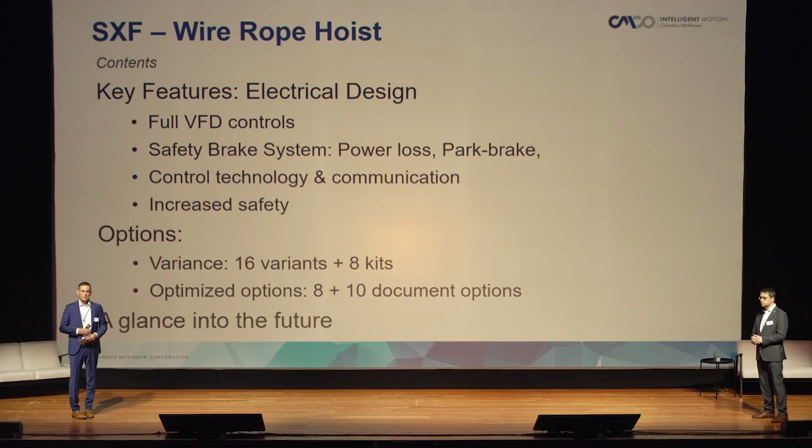Excellent, thank you. As we move towards the end, we'll have a look into where we are now with the product release and maybe some highlights to be seen in the future. To get started, we heard this topic raised a few times yesterday - a little bit of a teaser that Mark did up on stage, and we heard it a few times in different presentations. So the background to this project - why have we got this wire rope hoist, and what were the parameters that determined the project scope?

Basically the whole project started back in 2022, approximately, where we had the voice of customer feedback. There were also, as Mark mentioned yesterday, individual interviews to get your feedback on what you want, to better react to the market with a new product.

What we heard from you was that you need a hoist in the lower capacity range, somewhere around 10 ton and below. What was required here is a cost-effective solution. We know Stahl products have high engineering capabilities with a lot of off-standard options, and this often brings a higher price tag with it.

So, a cost-effective solution. And you can imagine at that time, 2022, we had some delivery and supply chain issues and struggles, as everybody did globally. So of course one of the key points here was also being readily available with shorter delivery times.

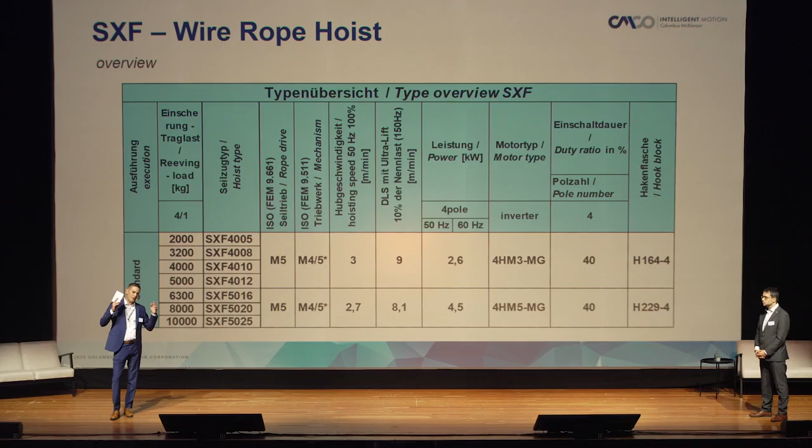So what we do have as we move one column further is, up in the blue field, this DLS mit ultra lift. Unfortunately, the field wasn't big enough to put the translation in there, but what that means is DLS stands for dynamic lift system with an ultra lift functionality. This is our increased lifting speed at low load conditions. Just hold on to that thought, and we'll touch back to that on the coming slides.

So we'll have to move on, and you may be asking yourself, where does this product fit into the portfolio? I touched on it before, and basically what we need to consider here is the technical specifications. As I mentioned, the product's not replacing any product lines, rather it has a new position in the product portfolio. The technical specifications together with the application determine the position in the product portfolio.

What does that mean? Basically, with this particular hoist system, we have a fit-for-function product. The idea is basically an out-of-the-box type system, so there's not a whole lot of changes in the system that can be done. It's out-of-the-box, plug it in, and it works and does its job.

We've had a focus here on easy design and installation, so definitely we've made some improvements with the new hoist design, for simple installation. One of the reasons we are presenting these highlights for you today is something we've been able to build up here as well: to integrate the expertise from the Magnetek product range into the STAHL wire rope hoist. Doing this, we've been able to create this DLS functionality, this dynamic lift solution, with higher speed ranges at no load conditions.

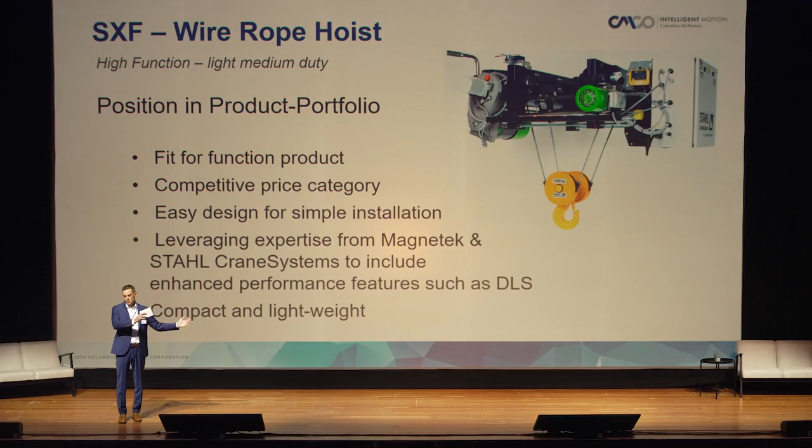Where it fits into the product portfolio, basically we're looking at a lightweight, compact class hoist in a competitive price category. So it's not designed to compete directly with the over-engineered product ranges that we already have available.

So as we look into some of the changes that have happened on the hoist itself, those of you very familiar with our products would have noticed straight away there's something missing. As we have a look at the hoist itself, the whole control panel has been moved from the gearbox side into a centralized control panel on the hoist.

Now we have our gearbox here. Starting from the top, we've got what Mark likes to call the 710 lid — of course, the oil lid, if you read it upside down or if it's been installed upside down, it's now a 710 lid, internal joke. Basically, we've got our oil breather valve at the top.

As we move down, we've got the gear limit switch mounted directly onto the gearbox. For the VFD applications, we have 6 switch positions: 3 at the top and 3 at the bottom. We have the slowdown area, respectively up and down, then the cutoff — the operational cutoff point — and then the emergency stop. We have this at the top and the bottom on this design.

An interesting fact that we have here is an encoder feedback. You may have noticed outside on the gearbox we have this little encoder mounted onto the gearbox shaft itself. This is a very unique system — the first of its kind where this encoder feedback actually goes directly back onto the SMC4 itself. So the encoder is not connected to the frequency drive at all. The whole controls are coming from the SMC4 and given through to the VFD drive itself for the hoisting motion. I'll touch back onto that again later as well.

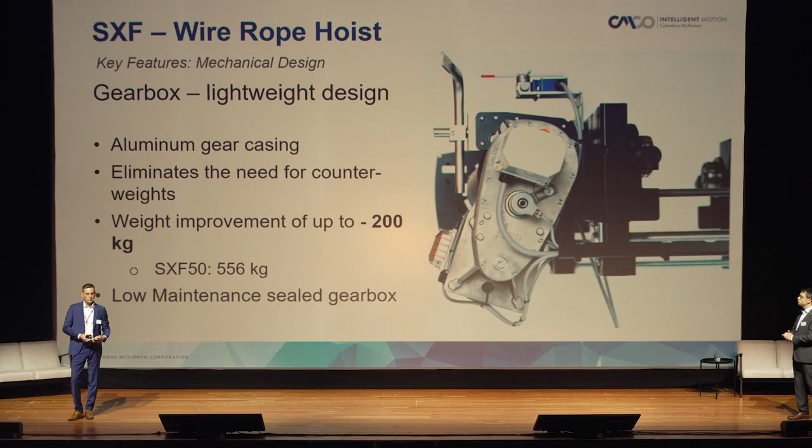If you later jump back to the product and look at it physically, just for our show purpose, we have selected a very small flange width of 160 millimeters. So only the 10-ton has then one small counterweight plate you can see if you know where to look. But all the units above 250 millimeters flange width do not have any counterweight at all. So with lightweight design on the gearbox side, and avoiding the counterweights on the other side, we have massively reduced the complete weight of the unit.

I'd like to take this opportunity to highlight one of the other special features integrated into this hoist system. What we have here is an adjustable flange width, as we had also in the past, but what we had to consider in the past was the counterweights.

Now, of course, the counterweights aren't attached to the hoist. For those familiar with our older SH wire rope hoist, we had the counterweights mounted on this side. When we adjust the flange width here, there's a shift of the weight distribution, and we'd have to put different amounts of counterweight on there to balance that back out.

Here we have a huge flexibility, a huge improvement. In most cases, there's no need to have a counterweight at all, apart from the scenario Mark just mentioned. So what that means is you have one hoist that you can put on stock and use for all possible flange width adjustments, apart from the one exception. That's a huge advantage, being able to take this hoist and put it onto any beam width without any further adjustments.

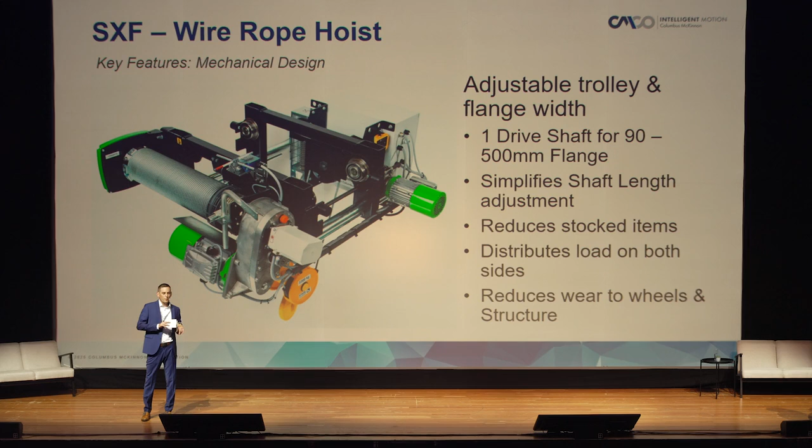This whole adjustable flange width is made possible thanks to a worm gear drive that we have installed here. You can see on the worm gear drive itself the drive shaft going straight through that gearbox, which allows us full flexibility for all possible flange widths.

Some of you that are really technical and familiar with our product may know that in the past on these drive shafts we had little snap rings. These have now been replaced with what we're seeing here on these smaller pictures with a locking clamp. What we have here is basically an adjustable clamping plate, so you can just loosen that screw, and that allows this shaft to be slid backwards and forwards.

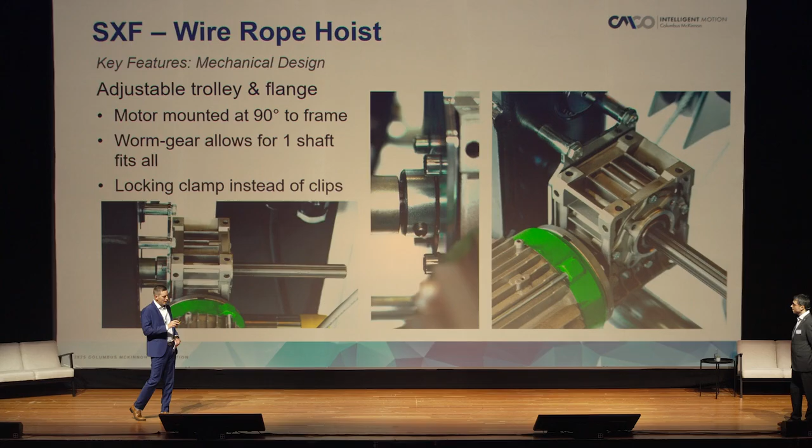You may be asking yourself, has this had an effect on the approach distances? When I see this motor here, 90 degrees mounted to the hoist frame, it could raise concerns about the approach distances of the hoist. Here you don't have to be concerned. Mark, I'll let you take over here.

So by flipping the travel motor upside down, we just get 40 millimeters better hook approach. However, if you sometimes need that last millimeter on the crane, and if you have a box girder high enough that there's no obstacle with the travel gear motor upside, you could turn it 90 degrees and save another 45 millimeters.

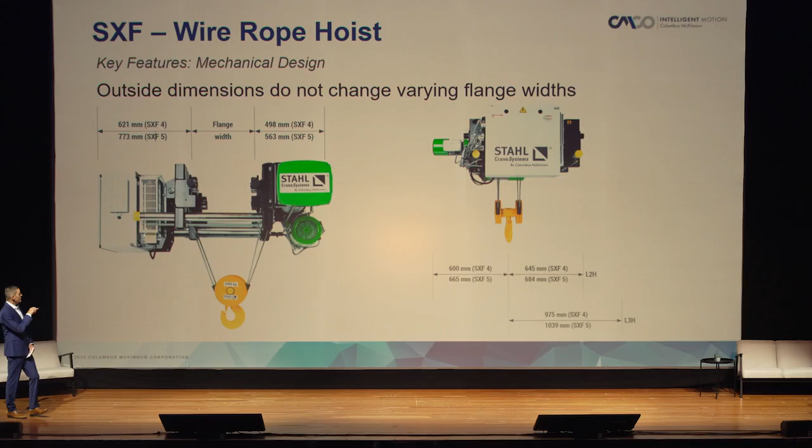So I guess what you're trying to say there, Mark, is previously we had the counterweights here on the SH wire rope hoist series, and with the control panel being mounted on the hoist frame, there's no change in the dimension regardless of the flange width. Is that right? Right. And you see also, especially here on the L2, the dimensions between left approach and right approach are very, very equal, so your approach load on the crane is very similar.

You would have seen outside also on the hook block itself, here we've got a new feature with us on the standard type application. We have a finger protection integrated into the hook block itself. Other manufacturers have systems similar to this, and a lot of them look at this in different ways, either finger protection or dust protection. Here we've managed to cover both scenarios, offering finger protection and also protecting the rope drive itself from dust, dirt, and things that might ingress into there.

The rope guide is a system we've been using for a very long time, so it's the system we've continued to keep on this hoist. You may have noticed this particular design is now in a hardened plastic design. But what's most important is that we still have a 360-degree clamping effect onto the rope drum. So if the rope was to be pushed against the rope drum, it would create an overwinding or slack rope situation that could become dangerous. We have a guaranteed 360-degree clamping effect onto the rope drum, holding pressure onto the rope the whole time, and we have a tension spring, as we had up until now with the other designs, holding pressure onto that rope.

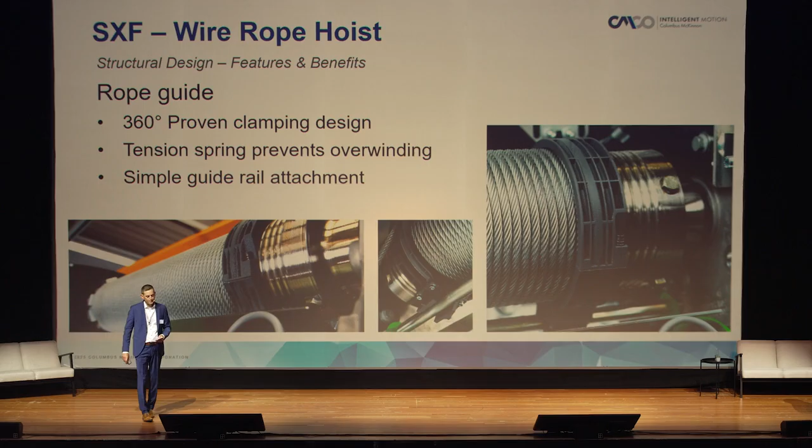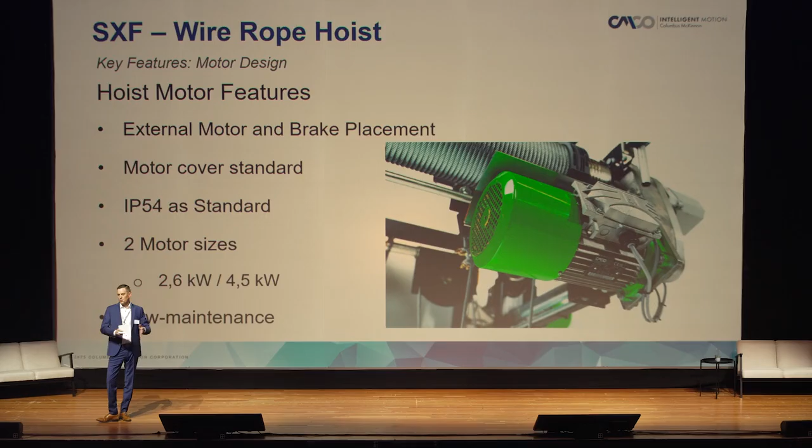As we move on to the hoist motor, there's not too much to go into detail here, remembering that our design target was to keep it simple, with easy access, low maintenance, and reliability. So here we have a hoisting motor from a European manufacturer, a very simple setup running an open loop circuit on these hoist configurations. So there's no encoder on the motor, remember we saw the encoder on the gearbox, so there's no encoder here, which makes for easy inspection and easy access to the brake. For yearly inspections, we have 2 motor sizes in total for the whole hoist range, and IP54 is standard, as we're used to for these types of applications.

So we can get into the electrics. Personally, for me, this is the more interesting part, but we're of course limited on time here today. I want to highlight some of the features we have in here. We have to consider, as I mentioned at the start, a hoist fit for function, out-of-the-box application, and what we have integrated into here as well is really high-quality products.

So we have the new SMC4 multi-controller device, as mentioned. The complete control panel has now been moved from our famous green control panel into a central control panel on the hoist here. Starting from the top left, we have the Magnetek inverter VFD for the hoisting motion controls, and on the right-hand side, we have the inverter for the travel inverter controls. I'd like to take this opportunity to mention a few facts about this. What we have here is variable speed control for the whole hoist unit, of course, but we also have some features and functionality in the background of these devices that offer good troubleshooting capabilities.

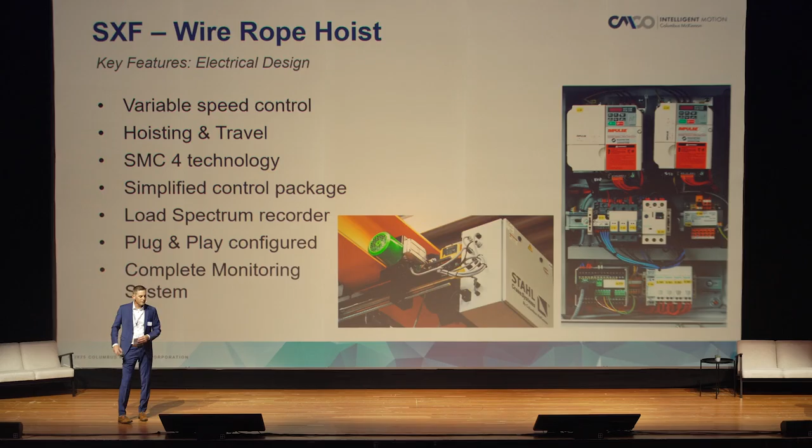Exactly. In the SMC4, we have this load spectrum recorder. Mark touched on it before—the values of the hoist are recorded, so the full load values are recorded. I can read these out for a yearly inspection and see exactly when the hoist may need a major overhaul or major service, or see the remaining running life cycle left on my hoist. The whole system is plug-and-play configured with complete monitoring systems, and as mentioned, the SMC4 is the complete control unit for this hoisting application.

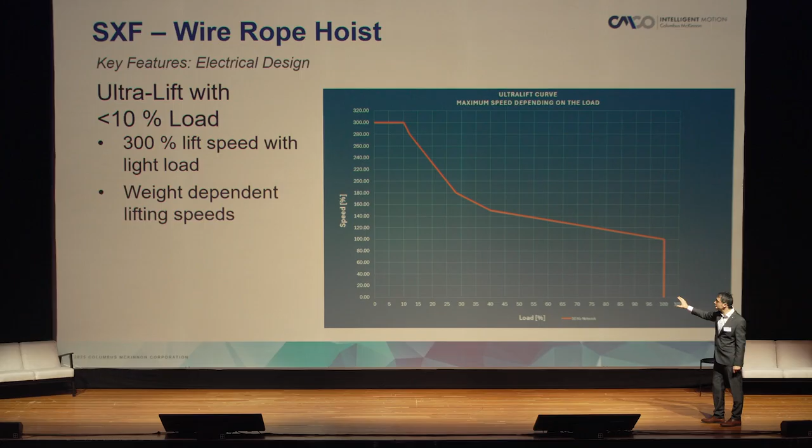And here we're seeing now a brief table of the UltraLift DLS functionality. Mark, please. Yeah, so you see on the left-hand side the speed range, and on the lower side you see the load. This curve is currently also subject to further improvement, but for the time being, if you order a hoist today, you will get 300% of speed up to a load of 10%, and then we follow the motor curve.

At 300% speed, representing 150 Hertz, or equivalent 4,500 revolutions per minute, we are in the position of the motor where we talk from the field weakening point. The field weakening point at these motors starts approximately at 87 Hertz, going all the way up to 150 Hertz or 300%. So we need to reflect that in the SMC.

We do that at complete performance level C. So all the speed monitoring and load monitoring is done in a dual channel mode. We have two kernels inside the SMC, and these two kernels are also interchanging values with each other so that we can claim that performance level C. These kernels, those processors, microprocessors, are also certified by TÜV.

So we follow the motor curve, and the bigger the load gets, all the way up to 100% load, we are then at 100% speed. That means in our case currently 50 Hertz, resulting in those 3 meters per minute hoisting speed, as mentioned on the previous slide.

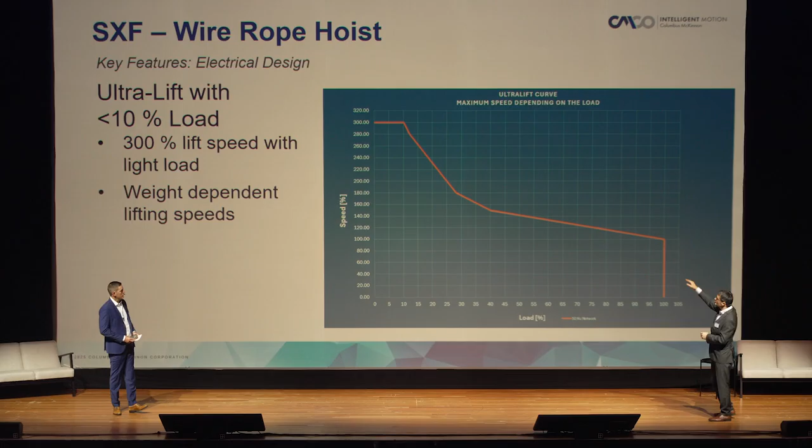As mentioned, it might be that we go a little sharper in the curve the more experience we get with the systems. Currently, the motor torque has quite a good portion above that, so the safety factor is much more than 2 currently, even more with the 2-speed motors. So it might be that in future—without promise, and therefore not shown here in writing—even 30% could be handled with high speed at the end. As mentioned earlier, we are not finished with the development in that complete series. What we have launched today and what is available with Sales Manager is what you see here, but further improvements may happen soon.

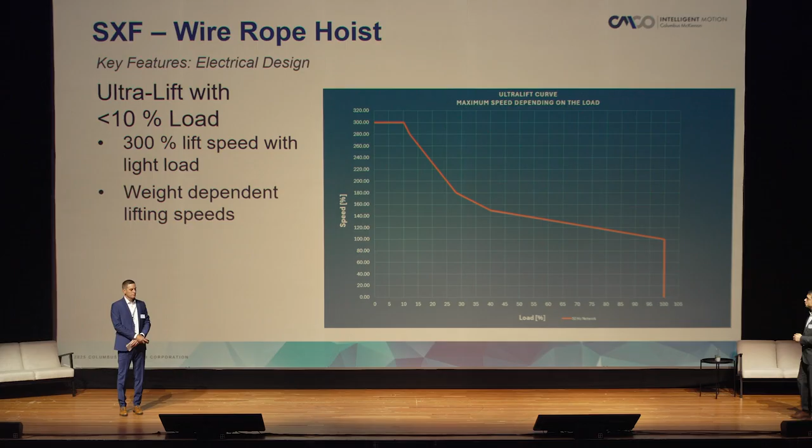Yeah, last but not least, I did mention a few of these points, or highlight a few of the points that are available with the SMC4. The SMC4 has been on the market for about 2 years now. It's an application-based device. Currently we use it for VFD applications on the SHF wire rope hoist, and of course now in this hoist here.

One of the special features that this device brings with it, as Mark just touched on, is the safety relays. The SMC4 is controlling the VFDs, and it's also cutting the VFD off in the event of a fault through a safe relay. This is something very critical and a huge highlight for this device, making it really the brains of the device when we're looking at this type of application.

So the SMC4 brings a lot of capabilities that we're used to or that you may be familiar with from previous devices. We have these load spectrum recorders in here, made possible through the SMC4's load-dependent hoisting capabilities.

For this particular device, I'd like to mention we have new software. This was needed to realize and view all of these rotation control parameters, since we have an encoder running through here now. It's a much more complex system, so we needed a new program to view all those data sets and be more flexible with the data itself.

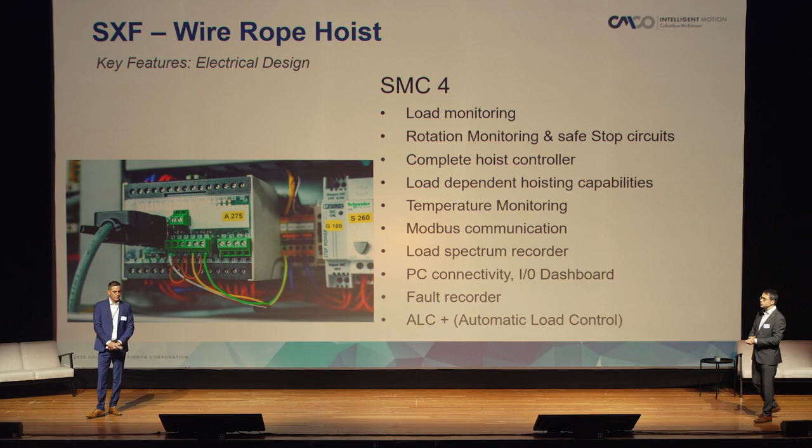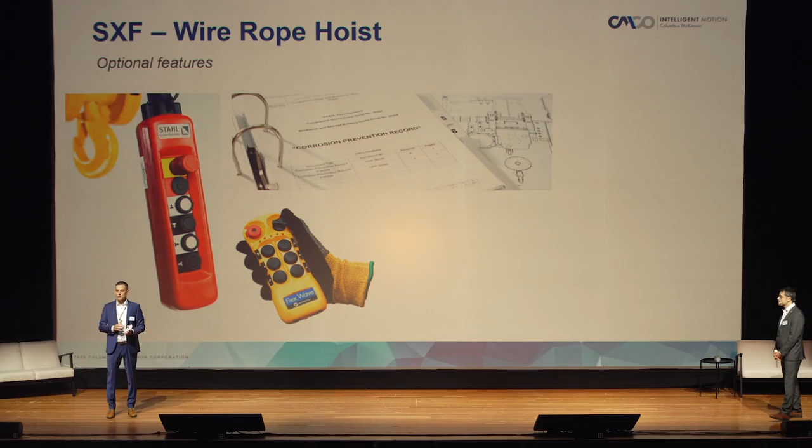Great, thank you. Mark did touch on some of the options at the beginning of the presentation. Of course, we also have radio controls on the system, end limit switches for the travel directions, and documentation options in the hoist configurator that's available.

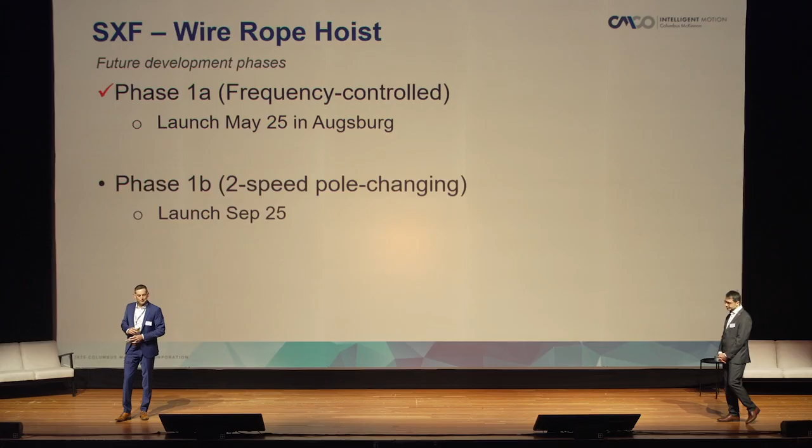Where we are today is the product launch. The launch was officially yesterday, so phase 1A is complete and the hoist is available in the system. Further steps to come, as we mentioned, will be a pole-changing motor - look forward to that release towards September, October, around that time frame.

With this system, we have a lot of technical changes to the hoist itself. So towards the end of the European summer, we'll be offering a one-day training package specifically for this hoist. Different from what we've done in the past, where we offered training programs for the hoist and then separately for the condition monitoring devices.

Here we'll be doing a complete package, offering service, maintenance and inspection training on the hoist itself, also touching on the fundamentals of the VFD controls, the condition monitoring systems, basically giving you a complete day's package training for this hoist series itself.

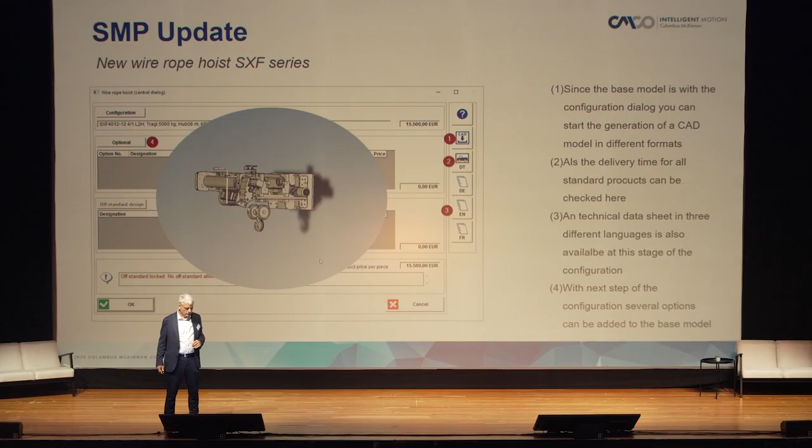The next button is for the standard delivery times - this is linked to our homepage, and you can check the delivery times. And the third is the technical data sheet button, so we have the technical data sheets available in 3 languages. It's also an additional document you can save locally and provide to your customer.

I hope it's not too fast. But all the people who are working with the program all the time, they know it's the same way as with all other products with our configurator tool.

So if you go to the next slide for the options, you have several options available, but it's a focus on the most needed options that are all things to make it more economical and to reduce the lead times. So the product has, with the complete control, for example, also the radio control available as an option.

And yes, the way of doing is very similar to all the other products. So very fast to the SXF model. The SXF model is configurable as a single hoist, as with this example, but it's also included to the crane kit configurations for the overhead cranes and also for the monorail cranes and the jib cranes.

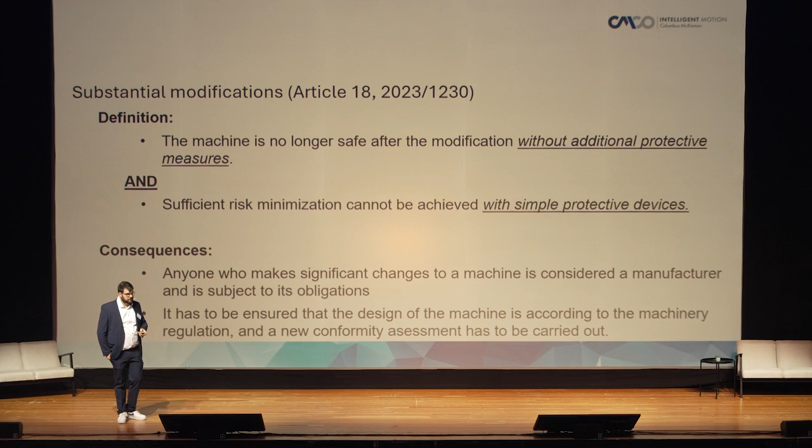So now let's start with the actual amendments. Let's start with a term called substantial modification. What is that? If you get a machine that already has a CE sign on it and you do some modifications, you need to see if you created new risks doing this modification, and you need to see if you can minimize this risk with a simple protective device. If this is given, you basically have a substantial modification to your machine, and therefore you have some consequences to face.

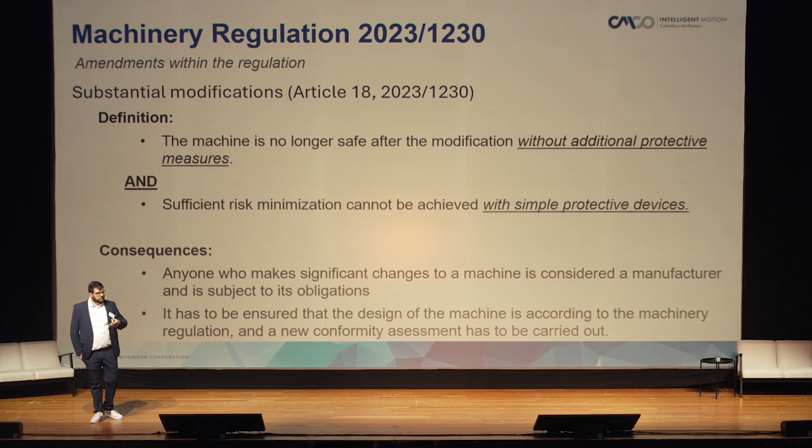Anyone who does substantial modifications is considered a manufacturer and has the same obligations as one. Therefore, if you do so, you need to ensure that the machine complies with the machinery regulation, and you have to perform a new conformity assessment as well.

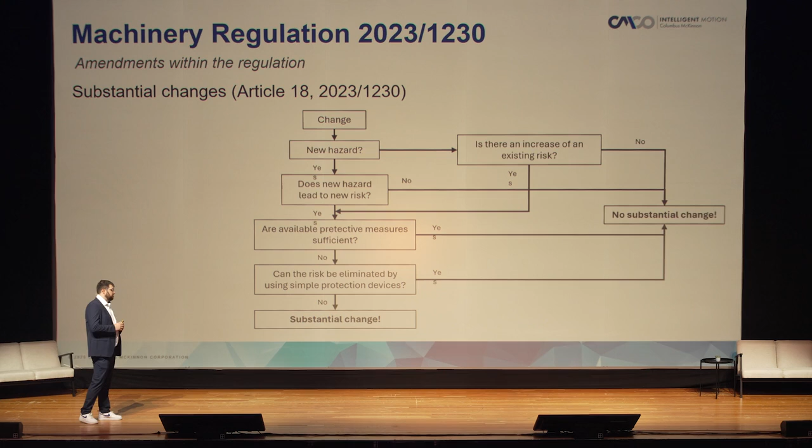If somebody is interested, we can also share this picture. I think it's a great opportunity if you face such a challenge.

Now coming to the biggest point, basically, which is the digital user manual, declaration of conformity, or documentation in general. With the machinery regulation, you are allowed to provide your documentation in digital form. But of course, you have to observe some points to do so.

You need to place your QR code or your RFID chip or whatever either on the machine itself, the associated product, the packaging, or accompanying document that comes along with the machine. The customer must be able to download it, print it, or save it somewhere so he's able to access it from anywhere, especially in case the machine fails or something like that.

And of course, a machine lasts some years, hopefully, and therefore you need to provide the data for the predicted lifetime of the machine, but at least for 10 years.

And now the last, but one of the most important points: the customer still has the right to ask for a printed version of your documentation. And if he does so, you need to provide it to him within 1 month and free of charge.

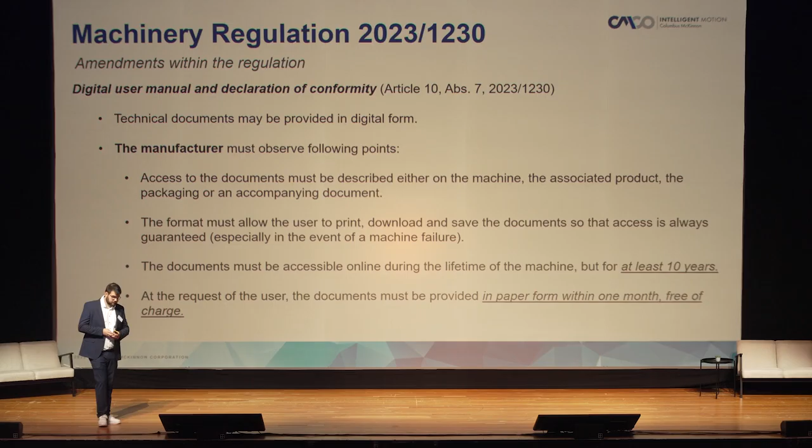Let's talk a little about the conformity assessment procedure. Basically, this is the main part that everyone takes into account when releasing products. Using harmonized standards or parts of them still stays valid.

So you design your product, you use harmonized norms to do so, you do your risk assessment afterwards, you collect your documentation, and then you create your CE conformity declaration in the end. That is still valid. What is new is the presumption of conformity by a technical specification.

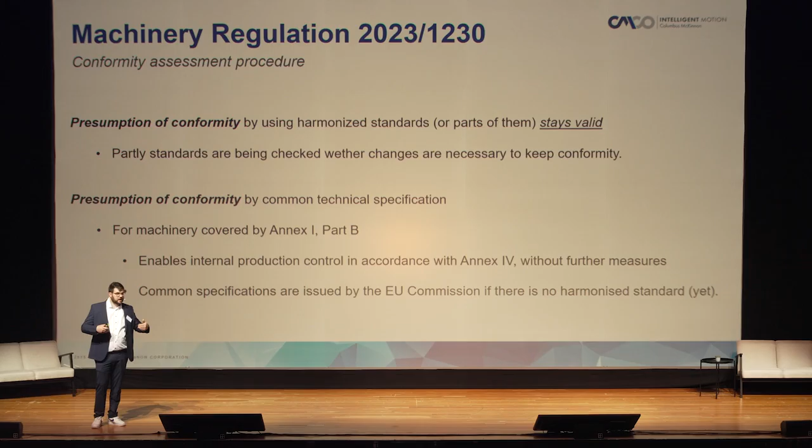This is specifically related to products that don't have certain standardized or harmonized norms yet, but the EU is handing out certain specifications, and if you apply those specifications, you can carry out the same, let's say, more simplified procedure as I mentioned before.

Let's take a look at that. So on the left side, as I mentioned in the beginning, your machinery is not listed in Annex 1, so you comply with your essential health and safety requirements. You do your internal production control, prepare technical documentation, and then you attach the EU declaration of conformity and put the CE marking on your product.

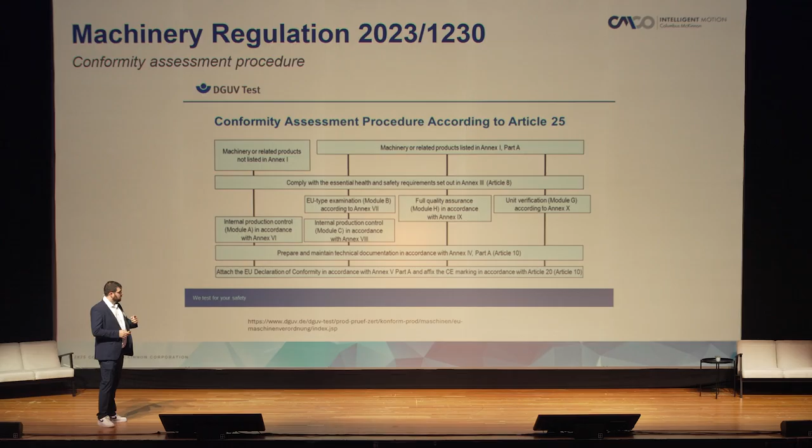Compared to that, on the more right side, you have the procedure for an Annex 1 product. What doesn't fall out is the essential health and safety requirements, but to be sure that your product meets the given regulations, you have to either do the EU type examination, which is more common with ATEX products or similar, or you have to do full quality assurance, like mentioned in Module H, or you have to do a unit verification. Doing so, you can slide back into the usual process.

So now comes the special part. If you see that one of your machines falls into Part B of Annex 1, you can go to that point with the specification, and that allows you to get rid of all what is on the right side, which takes a lot of money, time, and nerves to do.

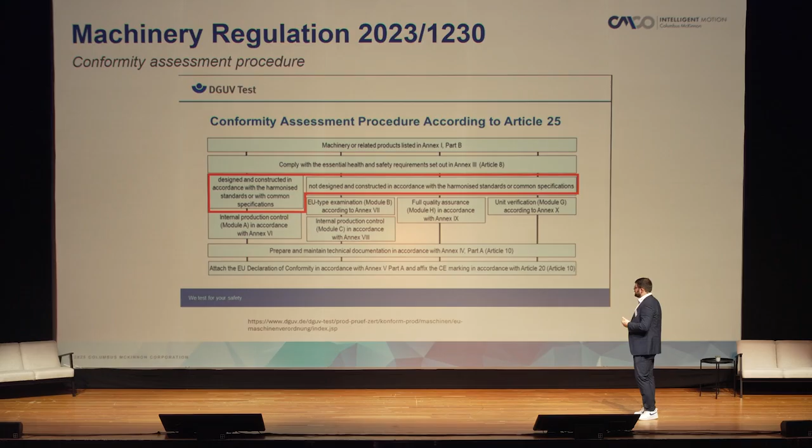Some of you might face that. It's not fun to do so. It is a great chance by the EU to minimize your efforts.

I talked about digitalization and AI in the beginning. So what comes along with that in terms of the machinery regulation? They integrated risk from AI, and there is indeed a separate regulation on AI, but the machinery regulation nevertheless includes some points that you need to take care of.

In fact, partially or fully self-developed learning falls under Annex 1. So if you have a machine with self-learning functions, you need to take a deeper look, and you need to do the full assessment as shown in the previous slides.

Then there are IT safety and security requirements for control systems. As a manufacturer, you need to make sure that at any time nobody is able to enter the system to perform any harmful actions, or to change the system in a way so that it performs harmful actions by itself.

And that is also related to software, or they extended it to also focus on software and software updates. Looking at our nice cobot outside, we also see the point of human-machine interaction, which is now included and gives you new risks to consider when putting a cobot or something similar into your machine, or working together with such a robot.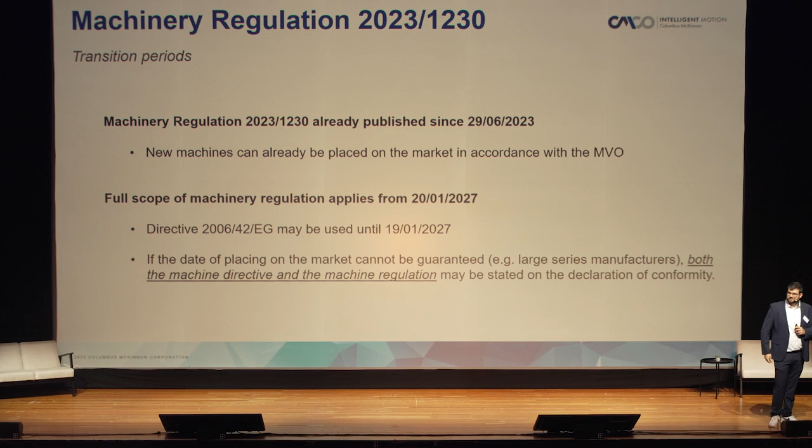My name is Timo Kircher, and I work full-time as a project engineer in the office in Ettlingen. As a sideline, I support our sales manager in crane technology. So I have prepared a presentation today about the various concepts of crane control systems.

I would like to talk about the complete control system, called KSK, which has been available in our configurator for a few months. I would also like to talk about the bits and bytes of a complete control system, which contains a PLC, a programmable logic controller. We call it KSKS - this comes from the German translation, but the S stands for the PLC.

Using some application examples, I will show you what we have realized recently. And last but not least, a few words about the future components.

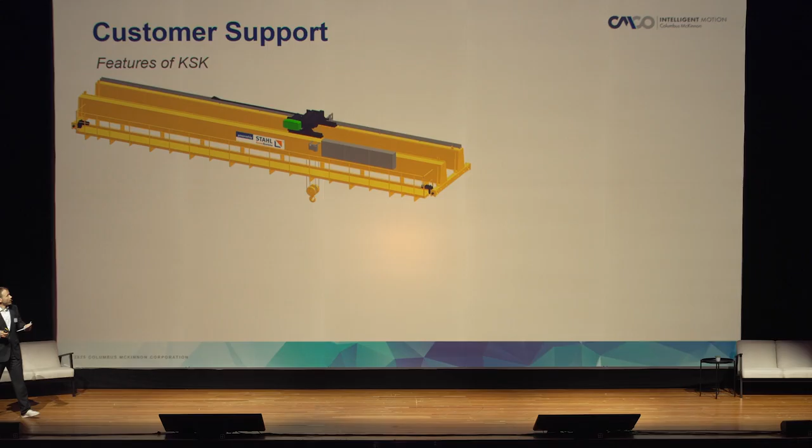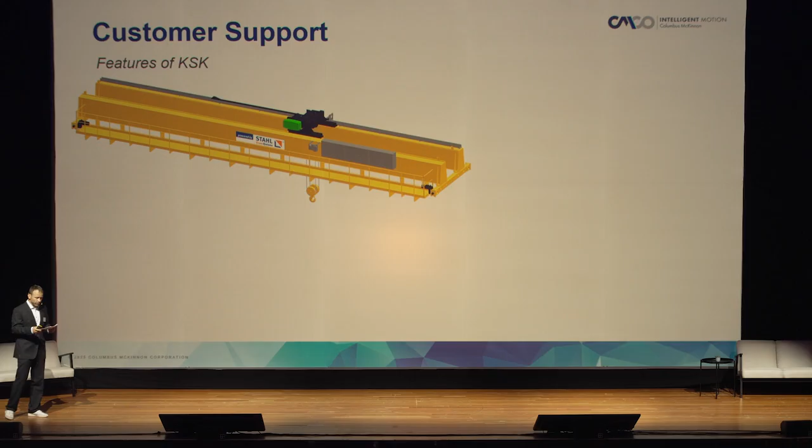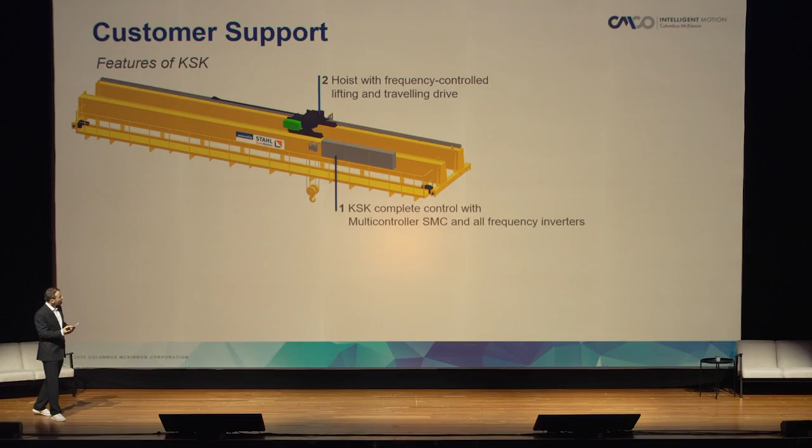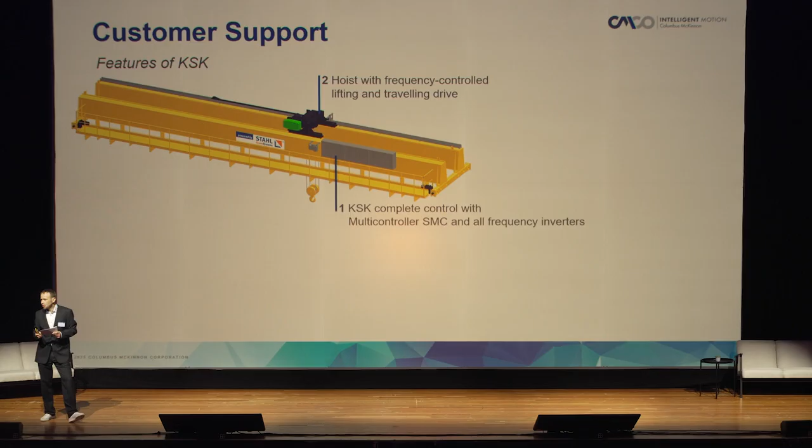For the configurable hardwired complete control system, we have focused on a specific crane type, shown here - the larger ones with higher capacities. This was our basic start for implementing it in the configurator. You see here in the graphic the big arrangement of control cabinets, because we now have an all-in-one arrangement - everything the crane needs is contained there. In the current configuration, it's possible to select one hoist. Expanding to a tandem application is under construction, so this will come, I guess, this year.

From the hoist size of 8 tons upwards, you can choose between festoon cable as power supply for a hoist, or even an energy chain like is shown here in this slide. For larger sizes, thick cable cross sections are needed, and then we go directly with the energy chain because it's more effective.

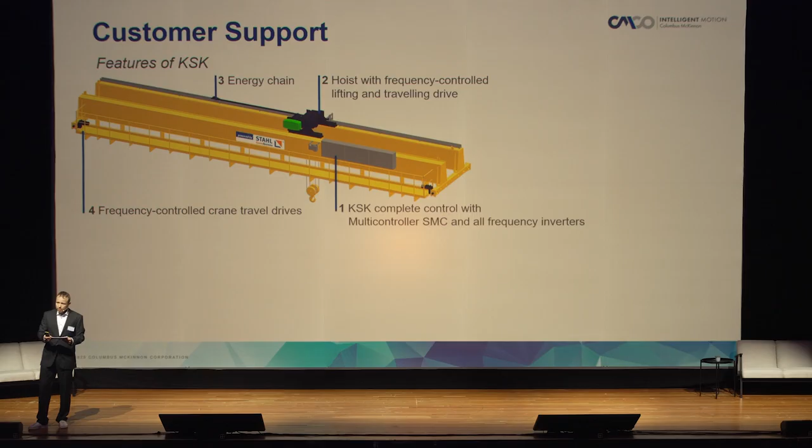In our package for the configuration, we just select frequency control drives for crane moving, hoist moving, and hoisting. To keep it simple and lean, we have a crane for more demanding applications, then this is the solution.

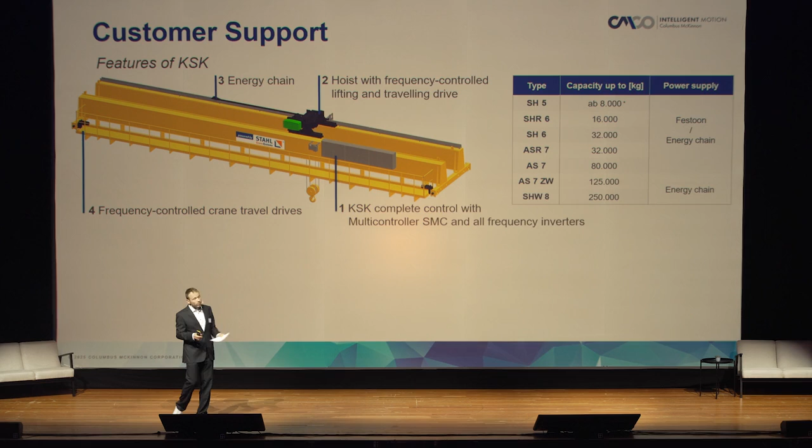On the right side, a small overview where you can see the hoist types and the capacities. We start approximately at 8 tons. For insiders, we start with the hoist SH 5, and there you can choose between festoon and energy chain. For the bigger ones, from the AS7 twin hoist upwards, it's only possible to select the energy chain, or the configurator selects the energy chain.

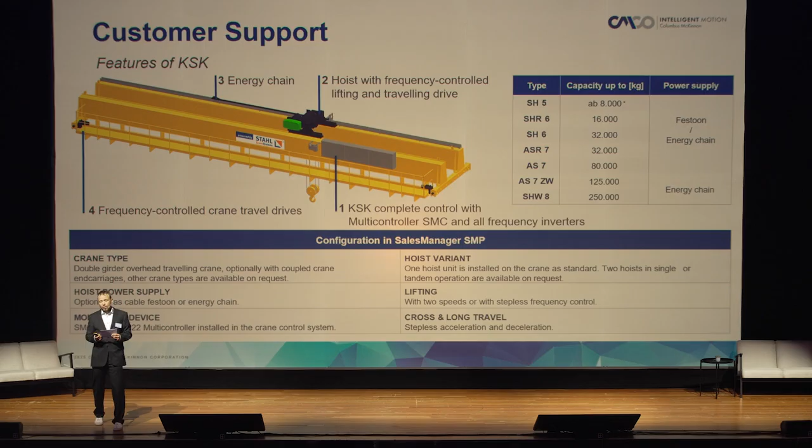If you want to read more about this, you can check out our marketing portal plus. There is a flyer showing all these details.

The bigger brother of this conventional hardwired complete control system is the KSK-S. Instead of contactor technology, a PLC is used there. You see here a rough overview. The main topic is only sensors and actors are located in the hoist. Everything else is located in the complete control.

The signals and information of the hoist are collected in the decentralized periphery at the hoist, and from there they will be transmitted by Profinet or even ProfiSafe for safe signals to the crane control. And the PLC in the crane control is the brain of the crane.

In addition to the bus lines containing Profinet and ProfiSafe, we need only power cables for the motors and the speed sensors due to some safety topics. So that means there are no classic control cables needed. For complex applications, there can be quite a lot of them, but we take the bus. There are a lot of seats inside of this bus system, so all information can sit in this bus.

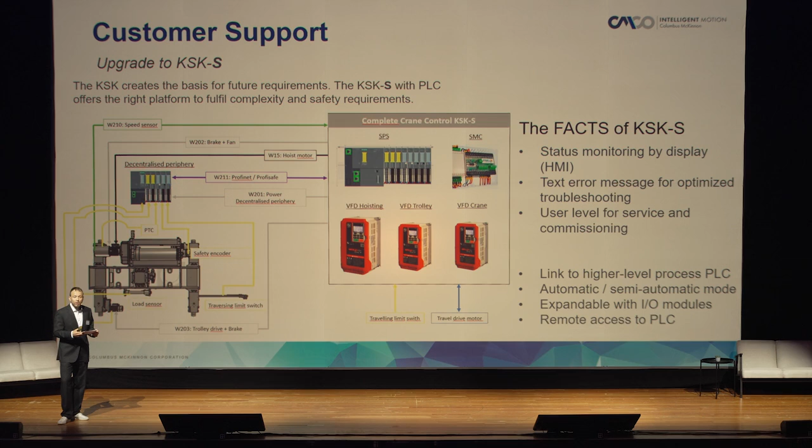Our concept is ideally equipped for the integration of a higher level PLC at the side of the customer, and we are ready with this for automated applications. Depending on the application, additional signals may need to be processed. This is no problem, thanks to the expandable I/O modules in this control.

We can see what we have realized with this kind of concept in 4 orders, which are implemented last year and will be implemented this year. Such a concept using a PLC always offers its advantage when a high degree of complexity, data transfer, control technology, or connectivity is needed.

In the first case, and I believe you know this case because it was mentioned several times yesterday and today, safety was on top of the list for the load summation and the crane tandem. The big specialty of this project was the complexity. We had to handle 8 different modes of operation: single hoist, reduced load, tandem, reduced load, and several things. So that means it was very complex to handle, and this kind of computing was helping us.

This was a new project, a new crane. But even old cranes, existing systems, can be upgraded with such systems. In the second case, we upgraded 2 cranes to a high level of safety in crane tandem operation. The data transfer between crane 1 and crane 2 is realized with industrial Wi-Fi, without cable.

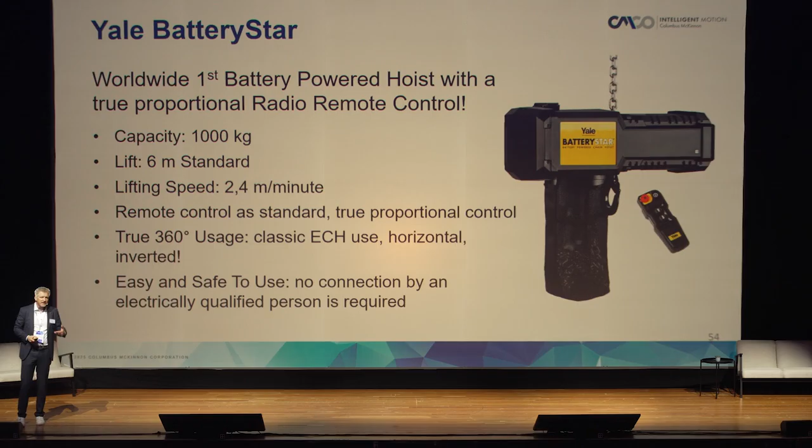Then we have the power hoist, the classic one. You have a jib crane, a light rail system, and you have a crane under the hook, under the roof. So these are the classical applications.

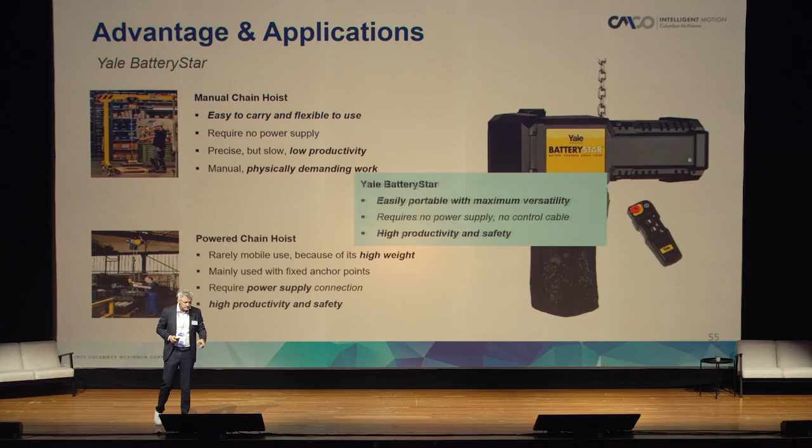When we did the BatteryStar, we simply pushed something in between - we did a mix of both. Now we had a small, easy portable hoist, but also with power, that was easy to use. So you might ask, okay, where's my application now? Because applications classically have fixed points and flexible points, and this is exactly what I want to talk about.

So where are the applications for the BatteryStar? I put a slide together showing a lot of applications. There's service and maintenance, there are others I'll come to later, and I'll show you an example where we see the battery hoist today with service application.

Here's a good sample - the service application where they replace a motor of a wire rope crane, so it's crane service basically. We get requests from crane service companies saying we want to have this hoist for doing crane service because it's more economic, easier for us. That's helping us, this tool. We ask, what do you use until now? They say manual products partly. So that's a big sample of one market, one niche.

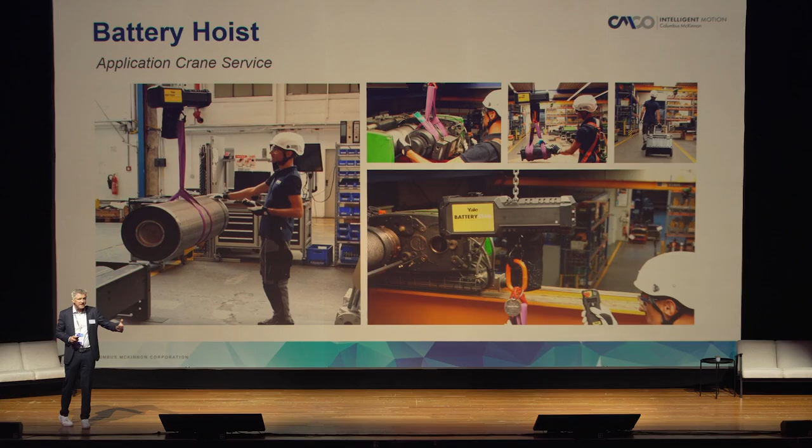I'll give you another idea, very interesting - I never thought about this before. Fire brigades and technical relief organizations. You might ask what they're doing with that, because usually - you see on the right side - there's a cable puller they have as a standard product, but they're very interested in having a more modern way of acting, more ergonomical. So what does that mean? How do you get to these customers? Because they have these trucks, and the trucks are very clearly stored, and if you don't fit in the space, you're not interesting, even if your product is perfect.

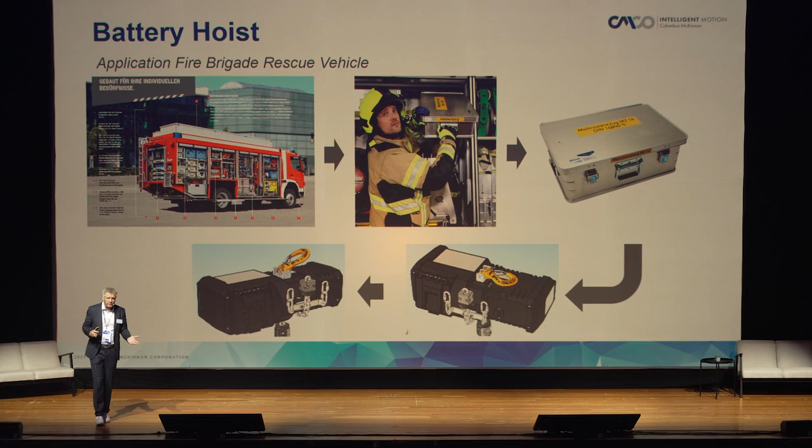So we talked to them, and they said, well, if you fit your hoist in one of the standardized boxes, then we are willing to buy the hoist. Easy said, but easy done - what we did basically was develop a foldable hook. Now we fit in the box, and now we're interesting for them. This is a sample out of Germany, and I think there are a lot of markets where we need to bring that to the table and say, hey, do you have a similar application? We are able to modify the hoist so it's even easier to transport - just to give you an idea what we are capable to do.

Our hoist would work here, I think. Again, we found the first customer said, yeah cool, let me replace the hoist I have today because I want a flexible hoist. I want to use it on this truck, on that truck - I need something I can use in various conditions, not just one. And it's very convenient for them because they have to inspect all the pumps regularly.

There are chains on the pumps that you can pull out, clean, repair, do maintenance, and put them back in place. So this seems to be a great application. Again, these are just examples, but I think it's very interesting for you.

Where are the hoists used? Because we're learning it right now from our customers. The next situation is basically mobile lifting applications, and you see a lot of applications. I found a lot of application examples on the web where our hoists are used.

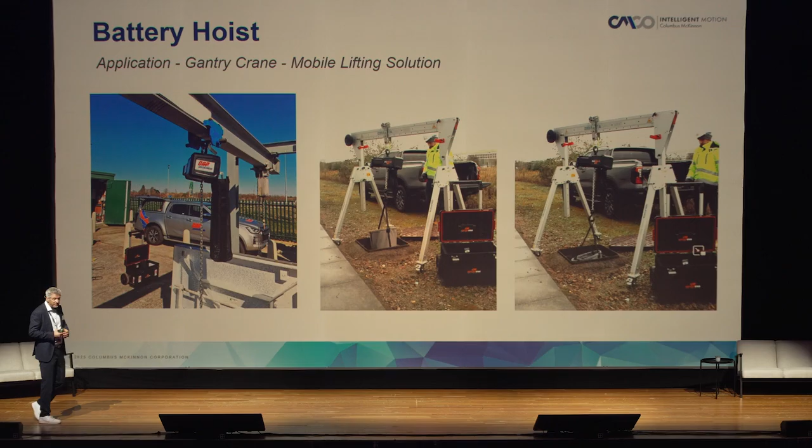So I think these are great applications and show there is no limit - customers find applications themselves. It's really interesting. We're learning, and I just try to share this information with you because I found out it's helping us really define the applications where we can offer this product.

And lastly, this is something I want to tell you about: entertainment applications. Now not everybody is in the entertainment business - most of you are in the industrial business - but there are also applications there, not for our big hoists, but small hoists used just for exhibitions where they lift up something. Then you have manual hoists most likely, but also here there's a demand for battery hoists.

In the US, we're already selling into this market. In Europe, openly spoken, we don't have demand right now. But I just want to give you this idea of what this is about, okay?

So last slide - I told you there would be a surprise. And the surprise is, I think it's two weeks old, that I pushed engineering to think about exceeding the limits of a battery hoist. So if you look in our brochures and catalogs, you'll find we are limited to a 6-meter lift.

Yeah, this is our standard, now we go up to 18 meters. So this is really new information and will scale our opportunity to use the hoist for other applications. I'll give you a sample in a second.

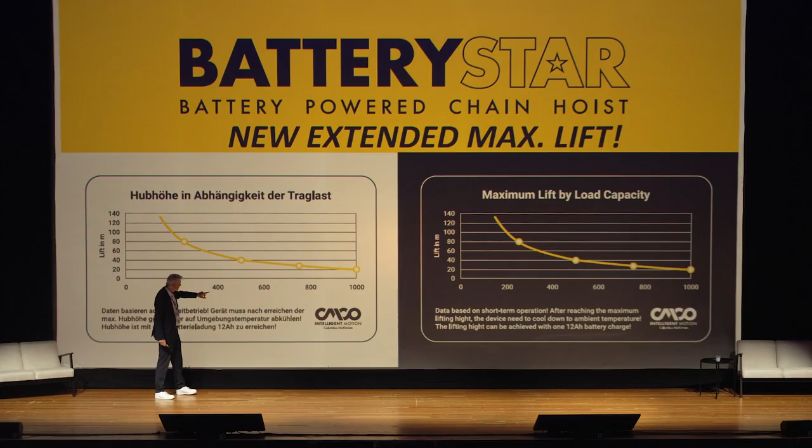So what we did basically, we let the hoist run and reduced the capacity. So what you see is, when you reduce the capacity, the lifting height increases - and we're talking about a cycle, by the way, so up and down. That means at 500 kilograms, you already have a 40-meter lifting cycle - 40 meters up, 40 meters down. And you can do that with one battery.

So if you go lower in weight, it goes higher in lift. But to be open with you, think about it - 2.4 meters per minute speed. That means if you do it with a quarter ton, you can drink more than one coffee until the load is really up to, what is it, 100 meters. So that makes no sense anymore.

But we already have customers, like I showed you with the crane on the truck - he said, I have a crane with only 750 kilogram load capacity. If I use your hoist, I risk damaging my crane because your hoist can pull 1 ton. Can you limit that? Can you do a capacity reduction? So this is also possible, it's also new.

So we can offer a capacity reduction - we lower the overload limiter and put in another workload so that we don't overstretch the structure of the crane where the customer is using it. So these are both pieces of news I'm sharing with you, and that leads to new applications because we can now reach beyond this 20-meter max.

The sample I want to give you is, we have an elevator manufacturer in Austria who inquired a couple of months ago, you wanted some hoist for doing maintenance in elevator shafts. He had a lift of 30 meters, but we were limited to 20, so we were out of the game. We went back to him and said, we can do it, but we need to limit the capacity. He said, that's fine, I only need to lift 400 kilograms. Solved. This is the message I want to give you: there are a lot more applications out there where we don't know what ideas customers have, but it shows the universality of the hoist.

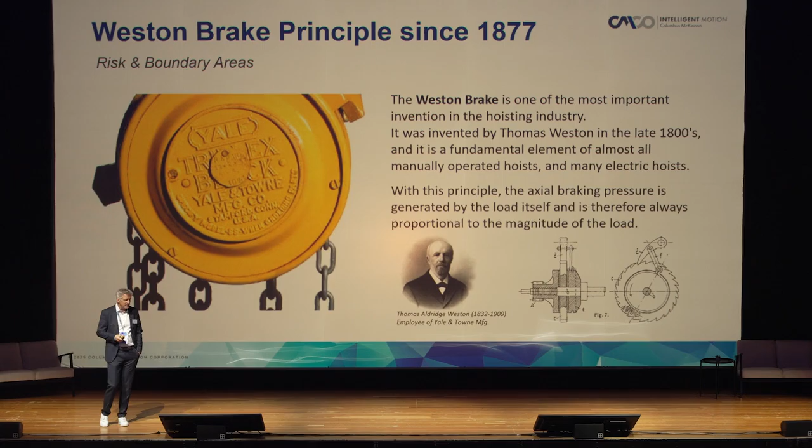Does it happen often? Occasionally, I would say. Do we hear that often, see that often? No, just when we have an accident, when something happens like with Airbus, when something happens with other big accidents. Safety health organizations know that, but they don't have a solution for it.

And what happens, by the way, these are all impacts that basically cause issues with the Weston brake. So think about it. If you have a destroyed ratchet disc, like on the picture on top, how shall the hoist brake? The pawls can't engage, so the hoist drops to the earth with the load. What if you have a lot of corrosion because you work in a humidity environment, outside?

A lot of hoists, like in the utility business, where they do the power lines hanging outside, get rusty. A rusty hoist means the pawl and the internal system is sticky, like glue. So now you operate the hoist, it opens, and because everything is rusty, the whole mechanics doesn't work anymore. It's everything mechanical. It doesn't engage anymore, the system doesn't work, the load is releasing. Bang! Accident. All standard products, all manual ones.

Overgreased. We have customers who send back hoists. We look into the hoist and see, wow, did you put the whole hoist in a bin of grease? Oh yeah, we put a little bit more grease on it. Problem, because if the grease gets to the brake disc, it's like on a car. The brake has no reason to brake anymore. So again, the hoist will drop the load.

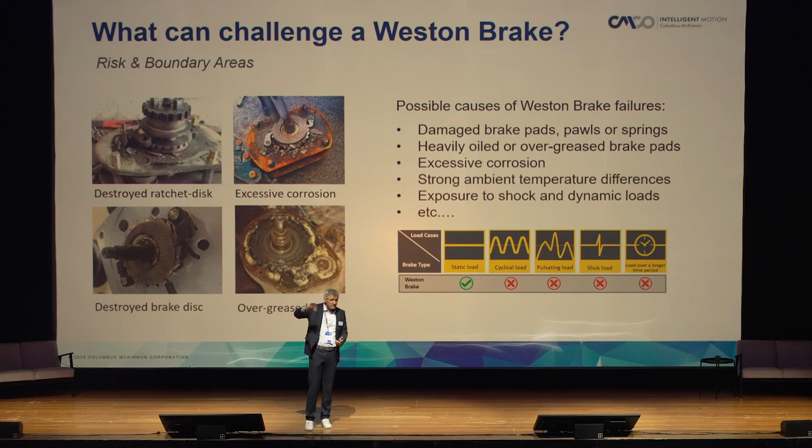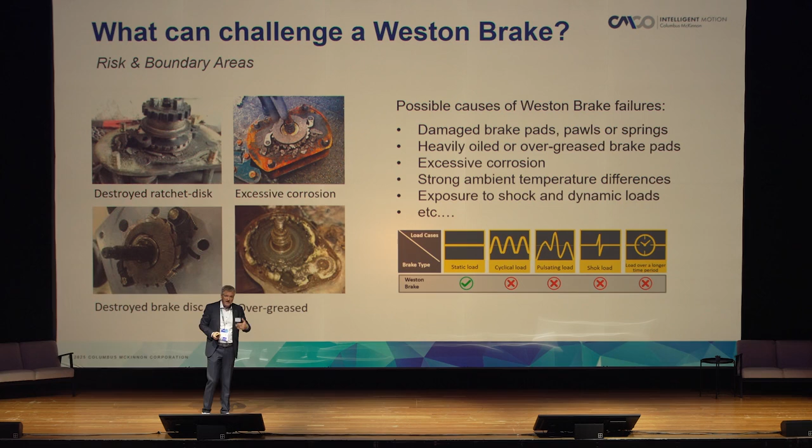Think about the hoist we have outside for the utility business - they have more the problem. When you install a power line, they have dynamics, pulsating loads. Then they have corrosion due to humidity because the hoists are used outside. All these effects, and suddenly you have a hoist that is not working. It happens - we had an accident years ago in Germany with the hoist. Therefore, we developed something. I'll come to that on the next slides.

So you might ask, and I think I explained it already, there are different failures - here just scenarios. The ratchet pawls are not engaging, the brake is not holding the load anymore. For a lever tool, does it mean the lever starts to flip around? We call that the helicoptering effect. There are also accidents where a lever damages, hurting a person by knocking on his head. And you can imagine if there's a 3-ton lever tool, what force you have on a lever.

So that is a possible root cause. Again, it can happen under the circumstances - it doesn't happen every day. Let me not go too detailed, but just tell you there's also the chance you can be in a lowering or lifting position, with different effects. But basically the message is the hoist always has a problem if you have a dynamic load. If the maintenance is not done well enough, then you have a problem with the product.

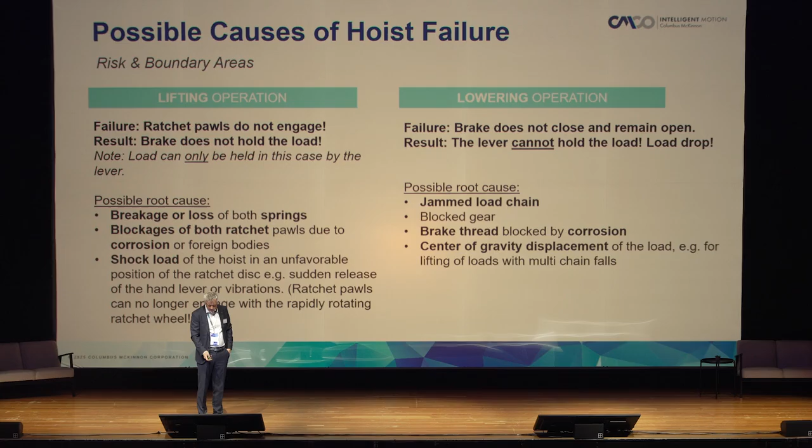So now I'm trying to get to the next page. Let me just think - I activated something. Okay.

So how do we solve that? We have a couple of solutions. One is very simple - a chain stopper and claw. This is a mechanical stopper. What does it do? You adjust it on the product below the chain, on the chain. So if the brake is not acting and the chain is running through the hoist, it simply blocks. Easy.

Disadvantage is you need to do it manually. That means the worker has to work, then attach it. Because if the distance between the chain stopper and the hoist is too big, then the energy is so strong that it will damage the chain stopper and your chain will break. So there's a distance, we say 15 to 20 centimeters, you have to adjust it. Again, it's for special applications where you expect this in the dynamics.

And then we thought it must be easier to do it. So therefore we developed this Ergo UT. UT is for utility, because especially the utility business has a problem with these effects.

So in this hoist, the advantage is it's automatically working. It means there's a centrifugal clutch that measures the speed. And if the speed of the hoist becomes too quick, more than 0.5 meters per second, then the centrifugal clutch engages, and it's a second brake, basically, a second brake in the hoist that will stop the hoist.

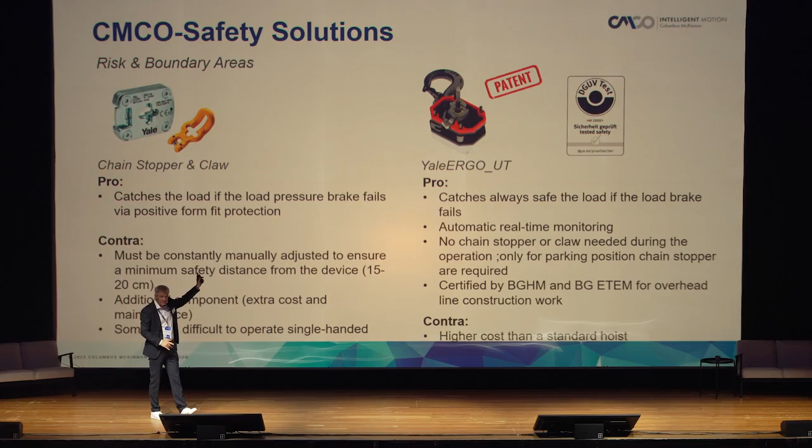And therefore we work with the safety and health organization, and now we hand to our customers a certificate telling if your worker is using that hoist, he doesn't have to use this, and on the flip side, he is really safe by working with that.

That is how they're doing that today. Think about this turbine, think about just leveling loads, think about the wind turbine. So now we can go to our customers and say, do you know about this risk? We have a solution for that.

And I think that's what we're doing, and I'm working with a development team with the safety and health organization, because the safety and health organization has a problem that they say that is risk, but there is no official solution. Therefore, we invite them, and we had already a plan with them established, what we need to test to certify our hoist for leveling loads.

And there are a lot of applications from big companies that come to us and say, please help us, because we have a risk. Safety and health organization tell us, don't do that, but we have to do it because we don't know another way.

So when we can establish this hoist with help of the safety and health organization to that solution, that will be a gain. So today, what we're offering our customer is, if you have applications like that, that are a little bit special for special environments, contact us. As an engineering team, we help you to define the solution and certify your specific need.

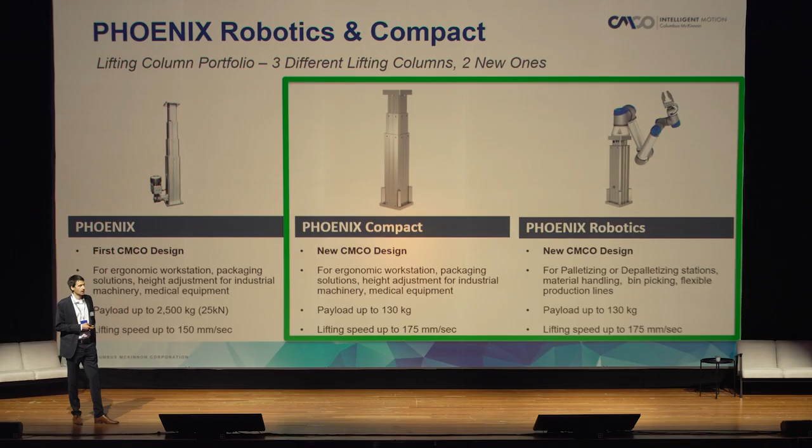It can lift also up to 130 kilos, so this is covering almost all collaborative robots. I would say 90% of the collaborative robots are in the scope, and we have a very high speed of up to 175 millimeters per second.

Why we decided to go into this new market for Silberblau is because we had customers coming to us who saw that the products in the market for robotic applications were not enough. There is a need for this product, but the competition was not fulfilling the high standards of the robotic requirements. We have a big benefit because of our experience with heavy duty lifting up to 2.5 tons on the lifting column. Then we took a look in the market, and it's actually quite incredible figures.

The market for robotics has grown more or less 7% every year. But what is most interesting is that we had double-digit growth of the small and collaborative robots. In 2017 there were only 11,000 collaborative robots sold every year in the market; in 2022 it was already 55,000, which represents more than 10% of the total robotics market.

What is also interesting in this figure, if we look into the application and use cases, we realized that those small and collaborative robots are mainly used, more or less 25%, in palletizing applications. And palletizing is one of our targets, where the lifting column is used in the most common application cases for the robotic arm.

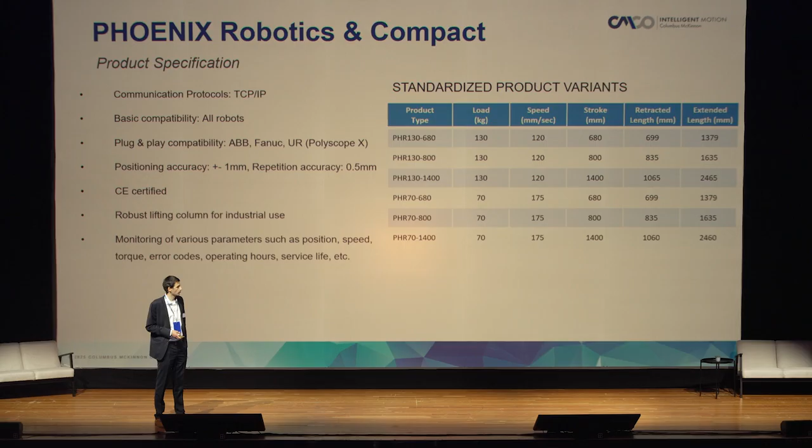Looking into the portfolio, we have listed 6 standardized options, but if you look into the details, there are basically two options depending on the payload: up to 130 kilos, and up to 70 kilos. With the payload up to 70 kilos, we have a higher speed, up to 175 millimeters per second, and with the 130 kilos, we have a speed of 120 millimeters per second, which is also very fast.

Let me now go into the details about the plug-and-play solution and the partnerships with the robot manufacturers, which is relatively new, being part of the ecosystem of the robot manufacturers. With this, we are entering a new way of collaborating with customers and partners. The big benefit of this ecosystem and plug-and-play solution is that we have a solution which is easy to use.

We are simplifying automation because it's pre-tested and certified, and it's much more user-friendly. We are minimizing the integration effort and setup time, so you can change the setup or configuration without any additional work very quickly. You have a very nice user interface, with an add-in from CMCO where you can monitor and change all the configuration parameters, all accessible from one point, the robot controller.

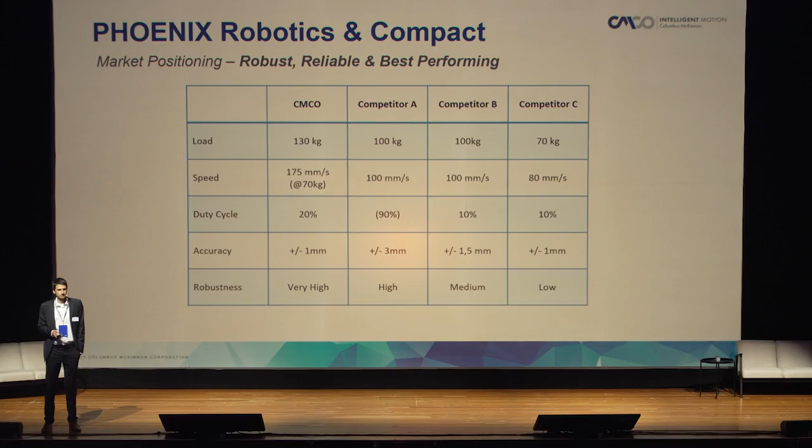Any other question? Okay, if you have any questions, you can reach me later. You can visit the booth outside, and you can contact me anytime to clarify any questions. Thank you.